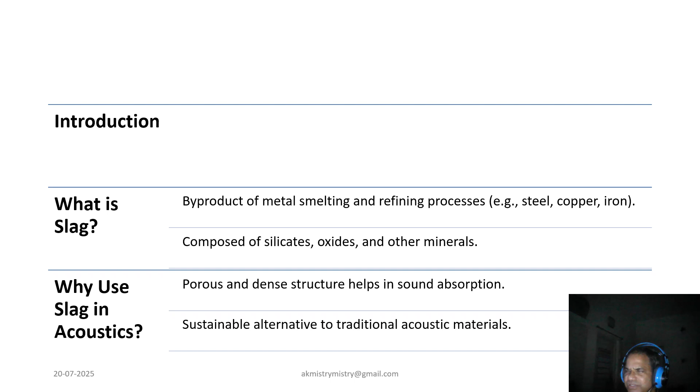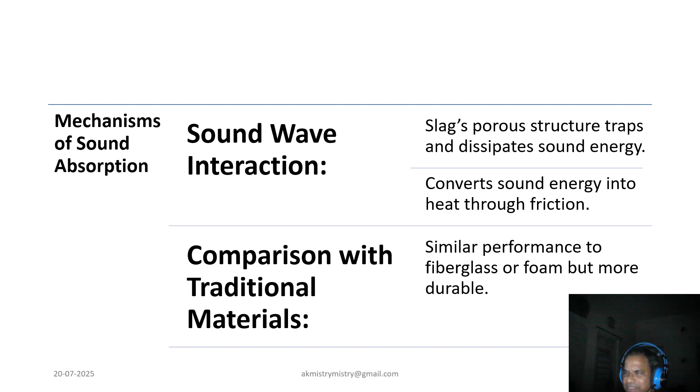Now, how does slag help with sound? Its porous nature traps sound waves, converting that energy into heat through friction. Compared to conventional materials like fiberglass or foam, slag performs similarly but with extra durability and environmental benefit.

Application of slag in the acoustic field has a tremendous role. Slag's acoustic versatility is very impressive. From walls and floors in buildings to noise barriers along highways and industrial enclosures, it's already making quite the waves. Even decorative panels can benefit from its sound absorbing property.

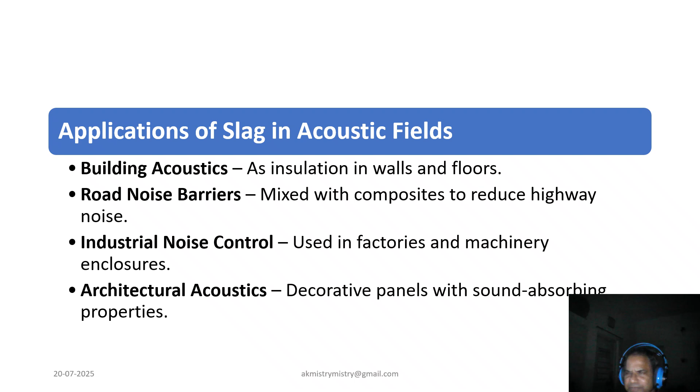Coming to the properties of slag for acoustic application. Now the question arises: why does slag excel here? Its combination of high density and porosity disrupts sound waves very effectively. Plus, it's thermally stable, perfect for high temperature environments. It's also eco-friendly and budget conscious, making it a top contender for sustainable acoustics.

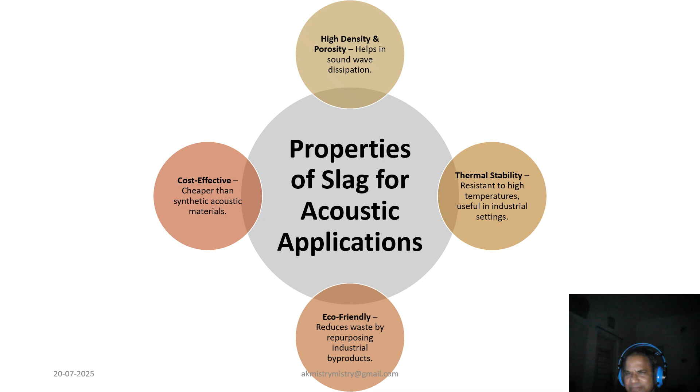Now, coming to a comparison which will sensitize us, and this is about slag versus other materials. Let's compare. Fiberglass is great for absorption but weak in blocking. Concrete blocks noise but doesn't absorb well. But if we think of slag, which is on the last row, it has both abilities surprisingly well. It does both. Its dual action is what makes it superior in diverse acoustic contexts.

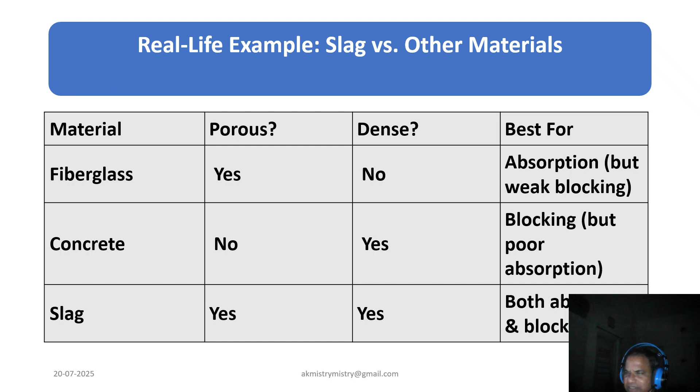Now let us see a few case studies and research findings. The case studies validate slag's potential. In Europe, highways use steel slag for noise barriers. Blast furnace slag enhances acoustic concrete. Research reveals 70 to 80% sound absorption in mid frequency ranges, ideal for traffic and industrial noise.

Now, coming to the shocking global data, the scale and the performance of slag globally: 250 to 300 million tons of slag are produced yearly, yet less than 35% is utilized, which is a very sensitive data, and it raises a lot of concern. Every ton used in acoustics prevents 1.2 tons of CO2 emission and saves significant landfill space.

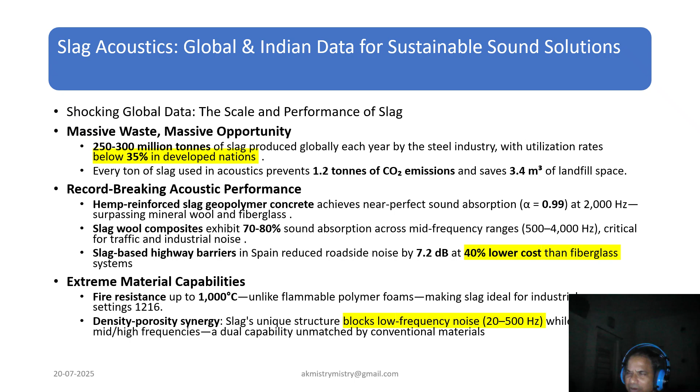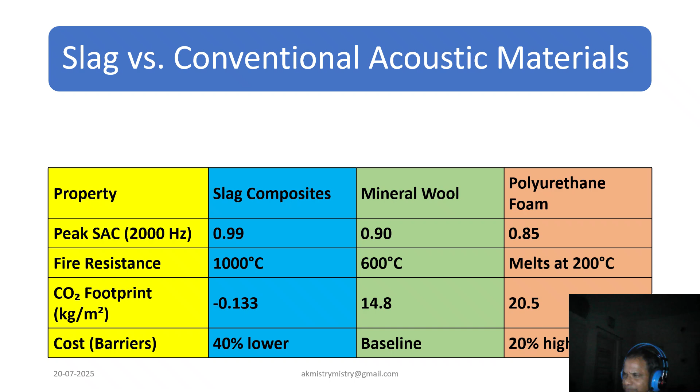With hemp reinforced slag, absorption can peak at an alpha value equal to 0.99, outperforming traditional materials. Here is a snapshot comparison. Slag composites outperform mineral wool and polyurethane in absorption, fire resistance, and carbon footprint. Plus, they are more cost effective also. It's a win-win for sustainability and performance.

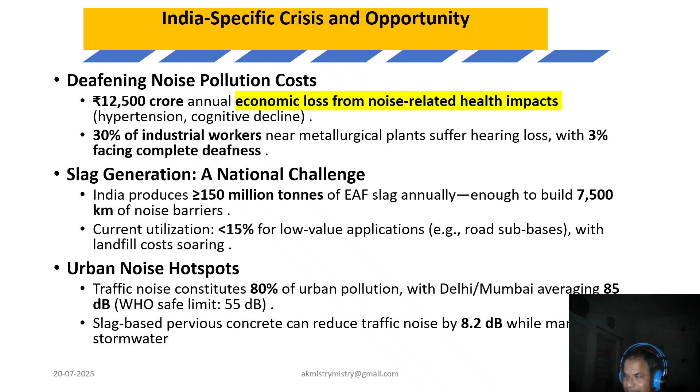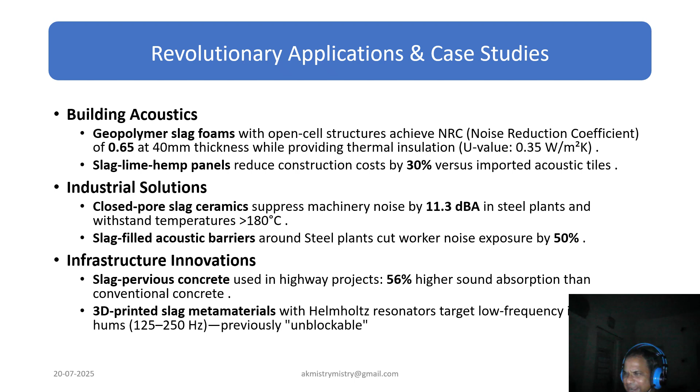Solutions are emerging. Geopolymer slag foams reduce noise and improve insulation. Slag lime hemp panels cut building cost. In a steel plant, closed pore slag ceramics reduce machinery noise by over 11 decibels. Highway projects using slag show higher absorption and better drainage. A double advantage, we can say.

So from 3D printed metamaterials to slag-based panels in steel plants, innovations are rapidly evolving. These applications target previously unblockable low frequency hums and bring industrial noise levels down dramatically.

In conclusion, slag is not just waste, it's a solution, a sustainable, high performance acoustic material that fits into a circular economy. With more research and strategic adoption, we can turn today's byproduct into tomorrow's innovation.